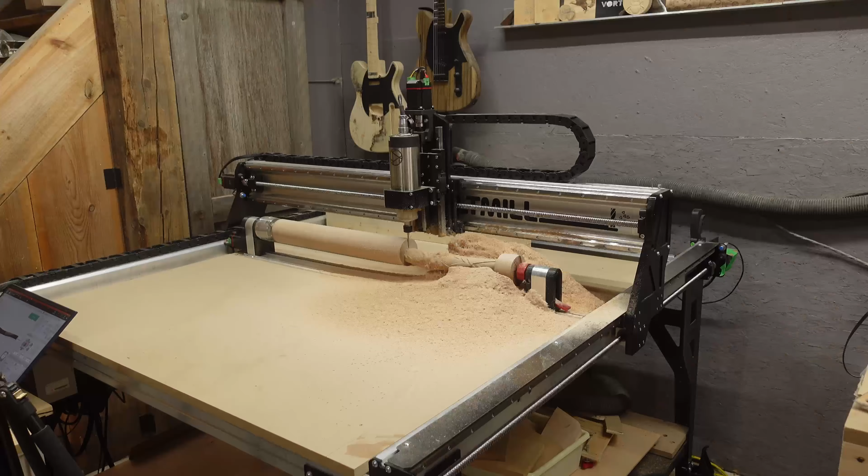I'm trying to keep my cool here, but I'm not gonna lie, it's pretty hard to contain my excitement. Why, you ask? The main reason for making this video is because we were invited by Vectric to present at their yearly user group meeting in Texas. We tossed around some ideas for topics, but ultimately, we decided on presenting a rotary project and showing how to use some really cool, lesser known techniques.

With the level and amount of information we are going to share at the UGM, we thought it would be a good idea for people to be able to watch a recap when they get home, just in case they missed any details, more than likely. And thus the 2-for-1 video was born. A super informative in-person presentation at the UGM and a tutorial video for those who want to learn about all these fun techniques. So what is the actual project going to be?

We are going to create an absolutely epic 60-inch long, 3-inch in diameter, 2-piece dragon-headed walking stick complete with scales. Woo! I can show you if you want. Look at this thing. It just keeps going. There you go. So we got the who, what, where, and why. Now let's talk about the how.

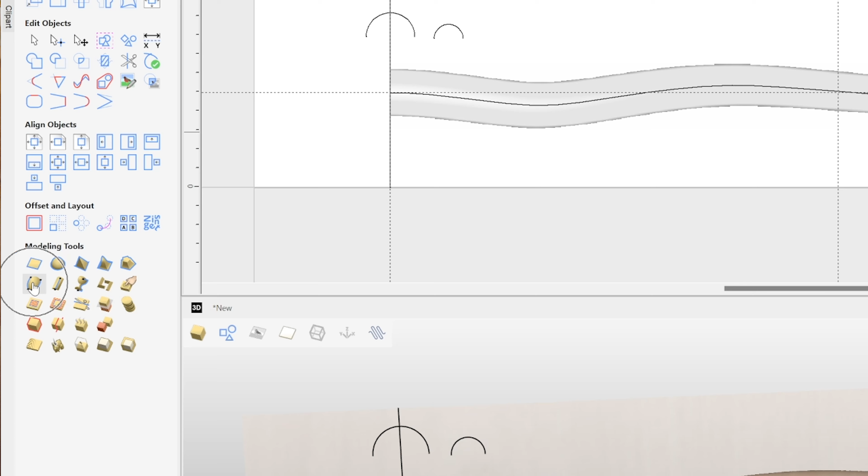We're going to create one component that's got some wiggle to it using the extrude and weave function. Then we're going to create another component that's got some wiggle to it using the 2-rail sweep function. Then we're going to tell the first wiggly component to follow the wiggle of the second component to morph it in kind of a helical modical thingy. That's right, I said modical. Everyone with me so far?

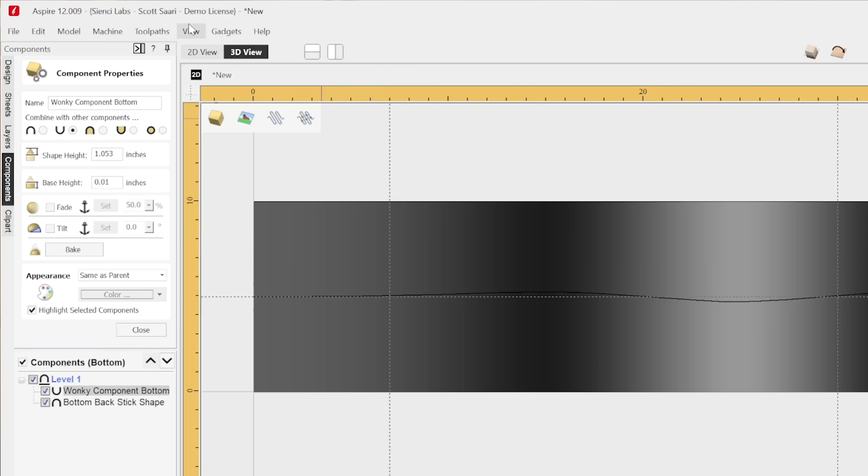It's okay if you're not with me. Believe me, I felt the same way while I was figuring this all out many times. And lastly, we're going to export that helical modical thingy to an STL, which will be used as the base for our full walking stick.

I do want to clarify that I purchased the dragon head model online that I'll be using for this project. I'd love to say that I modeled it, but ain't nobody got time for that.

The walking stick components need to be created in a double-sided document so we can create the top side and then mirror it to the bottom.

So the document setup is as follows. Double-sided, 60 inches long because that's how long I want the entire walking stick to be, even though I'm going to cut it in half to do the actual rotary. 10 inches tall. My rough stock diameter is 3 inches, so I'll make my material 1.5 on each side, so I'll get 3 inches total.

The rest of the file settings are your preference, so set them up to what you like to do and let's keep going. I've obviously worked through the kinks for my particular project, so you may have to do the same for yours if it's got any differences.

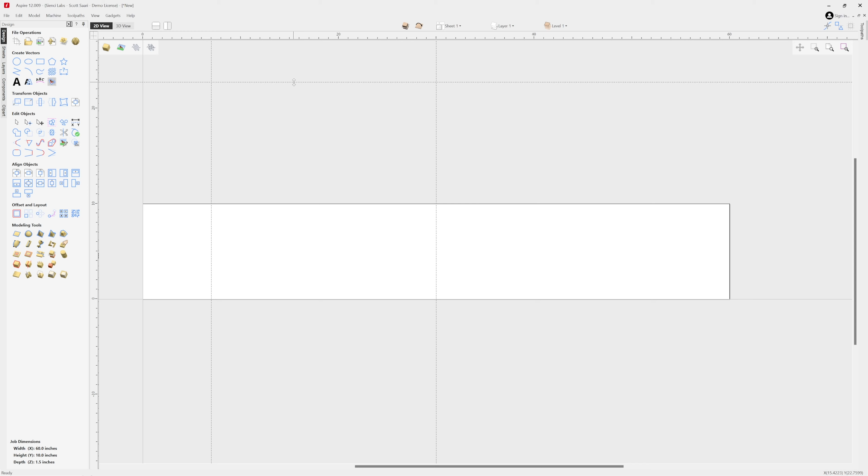I'm dropping some guides in as references. One guide at 7 inches for the approximate size of where the dragon head model will go once I add it. Another at 30 inches, which will be the midway point of the finished walking stick, and one at the middle of the document horizontally, so 5 inches in my case, which I'll explain why right now.

The first thing we'll need to do is to create a squiggly line. But before we draw the squiggle, we need to talk about undercuts.

For those who don't know, an undercut basically means an area with 3-axis rotary projects that the bit just can't get into because of the constraints of 3-axis carving. One of these undercut areas would be if you cut past the center axis of your project.

This factors in when we draw our squiggle and when we import the dragon head. You want to be aware of how far you push the squiggle so that it stays above the center axis, which is why I drew the initial guideline across the midline of the document.

If you don't fully understand, keep following along and I'll show you what this all means shortly. And even though you're armed with all of this info, there's still a chance that we create these components and still have to come back and tweak them. But at least you'll understand the how and the why.

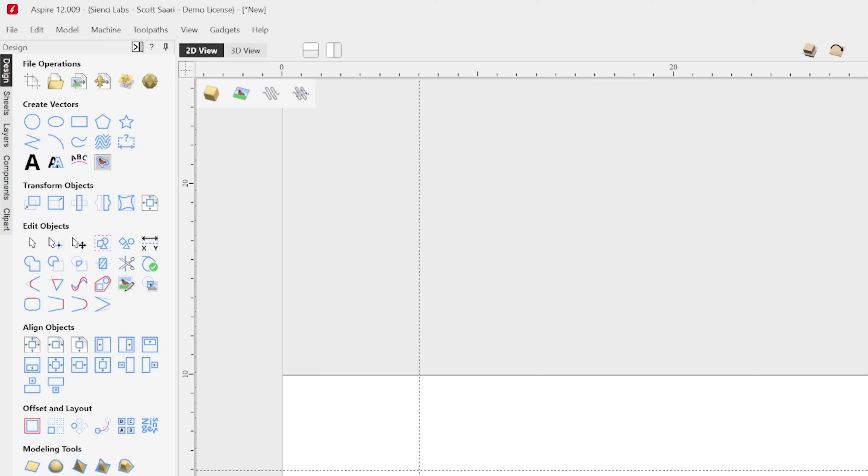We're going to use the draw line tool and create a wiggly line. Because I know I'm adding the dragon head to the top of the walking stick, I'm going to leave some space to incorporate that element later.

My experiment showed me that it was easier to make minor adjustments than major ones when we import the dragon head model later. Adjust the spacing and the beziers to your heart's content.

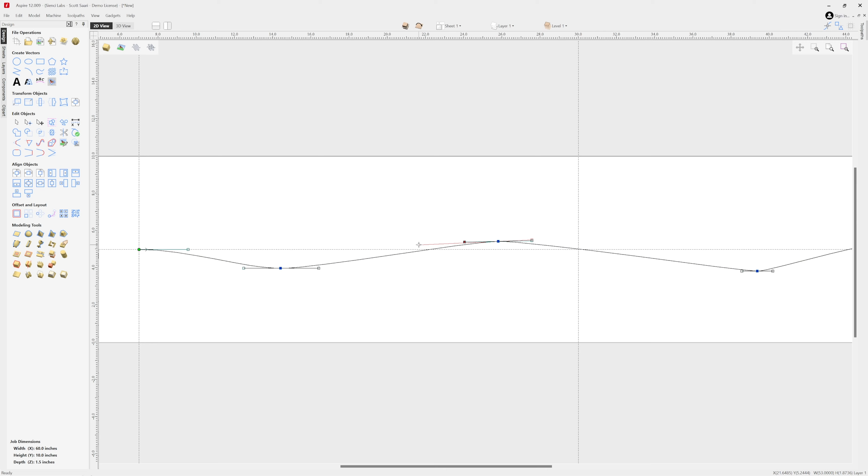Next, we're going to draw 2 circles, one for the top of the walking stick and one for the bottom. My material for the walking stick will start at 3 inches in diameter, so I'll make the top circle about 2.5 inches in diameter and the bottom one 1.5. These should give me a pretty good walking stick feel. I don't even know what that means.

These circles are a big factor in whether or not an undercut will occur. The diameter of the circles will dictate whether or not the model drops below that center axis, so that's something to factor in when you're creating these setup lines. The circle creation locations don't matter, so create or move them wherever you'd like to.

Enter into edit node mode, and when you see the little squiggle, type D to delete the spans. Now we'll create the first component using the extrude and weave function.

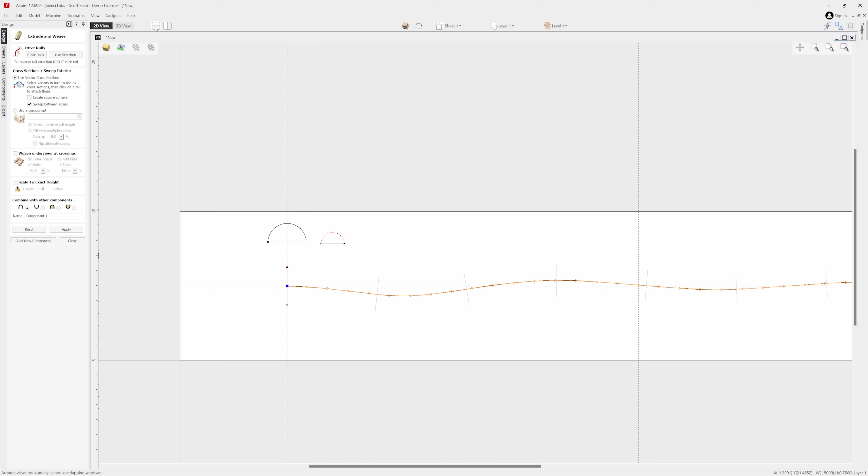We're going to tell Aspire to extrude the half circles along the wiggly line and blend them together along the way. We're basically creating like a tunnel shape. I like having my windows in split view for this so I can see what's going on. Grab your wiggly line and click Use Selection. That's my center line rail. The arrows show the direction it's being created in, so if you want them reversed, right-click and reverse rail.

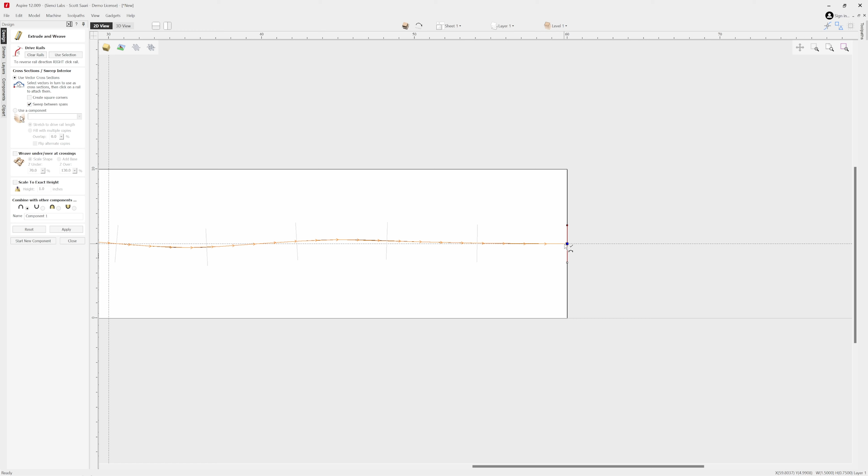Then grab your larger circle. You'll see a little check mark pop up when it's in a spot where you can attach it to the line. I'll select the top of the walking stick with this one, and then do the same for the smaller circle at the bottom. You'll see corresponding color nodes for where each cross-section's start location is.

I'll leave both square corners and sweep spans off. Neither of these will factor into the shape we're creating this time around. Sweep between spans can help control the shape outcome when using different shaped cross-sections, as long as I have the same number of nodes, so have some fun with that when you experiment. I'm not weaving anything this time, so that's off. Scale to height is off because the circles we created are dictating the height.

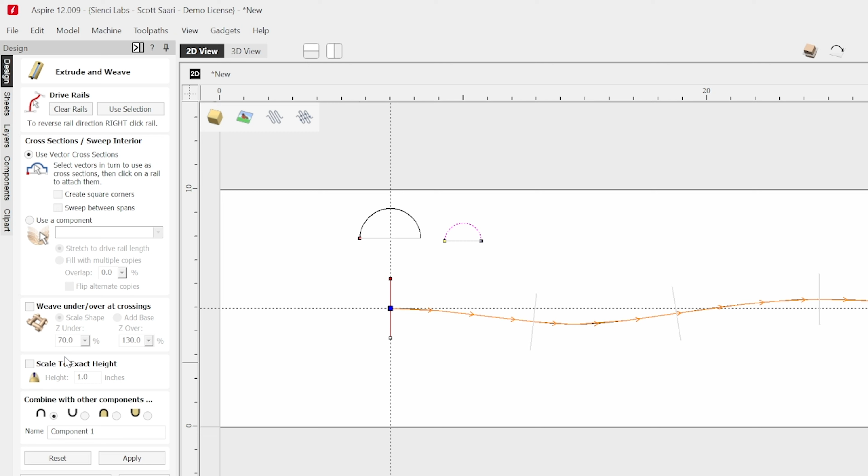I'll name the component top front stick shape. Click apply, and ba-bam, you've got yourself half of a walking stick. This is the first chance you'll have to see if there are any undercuts going on, so let's have a look. You can see no part of the newly created component goes past that center axis, so I think we're good to continue. If you did see a part that looked a little sus, just delete the component, tweak the lines, and recreate until you've got it nailed down.

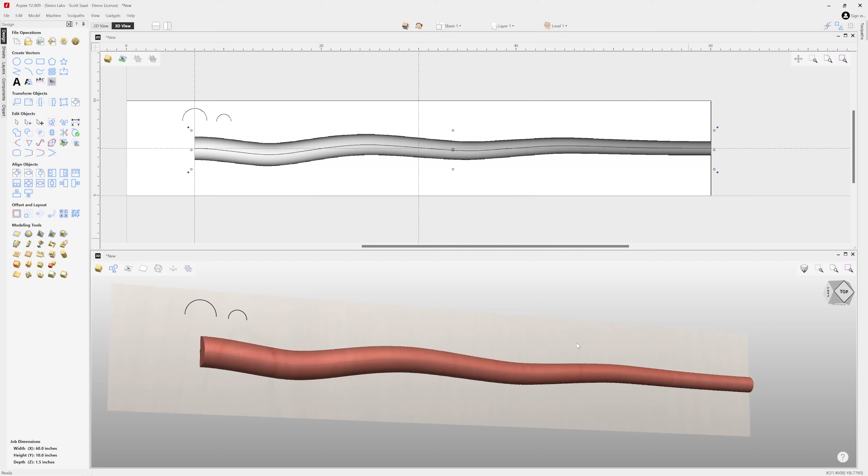The 3D view is currently only showing what's on the top side. If we toggle both sides on, nothing will happen because there's nothing on the bottom side yet. Let's put something back there. Right-click on the top side stick shape component and select Copy to Other Side. You'll see now the top side component mirrored on the bottom, and it's starting to look like a wonky walking stick.

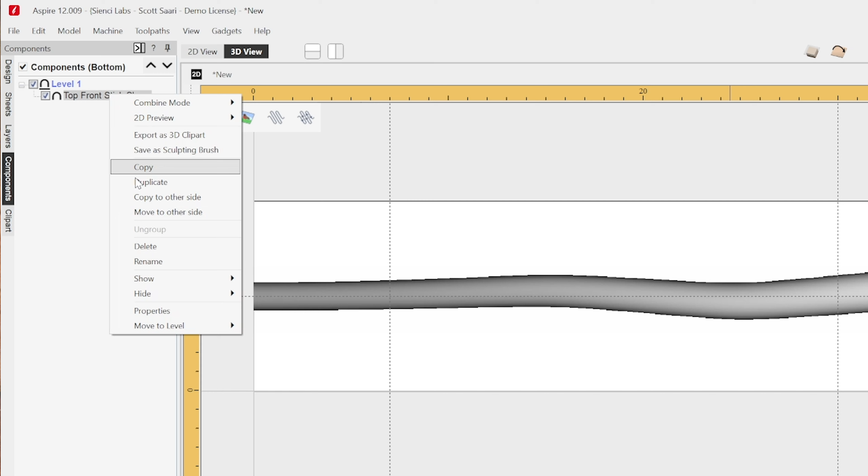I will rename the mirrored component to Bottom Back. My issue now is that there's only wonk in one axis. I really want it to be wonky in 2 axes. We still haven't determined what the right pronunciation is. There's just not enough wiggle all around for me.

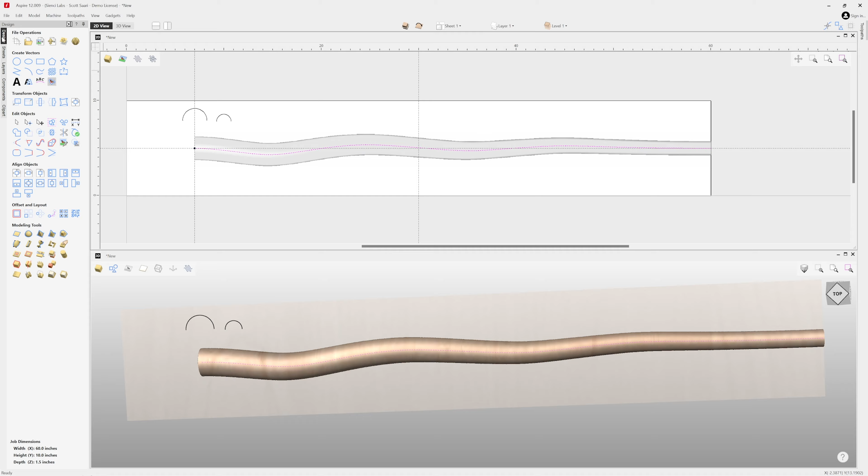So let's create the second wiggle component that will add some wiggle to the first one. In my 2D view, I'm going to use the same wiggly line we used already. I'll create one vertical line on the left, then Ctrl-Shift-H to create a copy horizontally on the opposite side of the document. Ctrl-Shift-V will create a copy on the opposite side vertically.

Select 2 rail sweep. Select the 2 straight lines and use selection. These will be the drive rails this time. You can single select these to change the order, but that doesn't matter for what we're doing here. Select the cross section, the wiggly line we already created. Same as the first extrude we did, I'll leave all the options off.

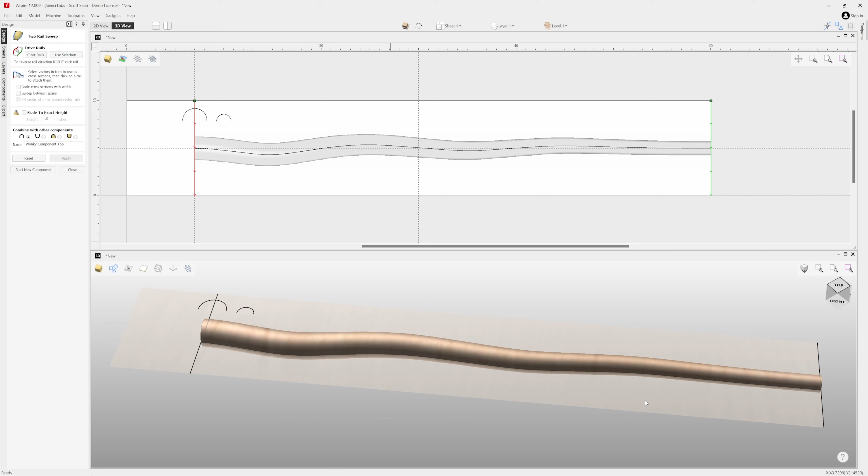I'll bring my split view back up so you can see the magic happen. I'll rename this component to Wonky Component Top. As soon as I click apply, you'll see it create a second component that will automatically force the first component to bend to it. Ta-da! Super cool! Here's the newly created wonky component.

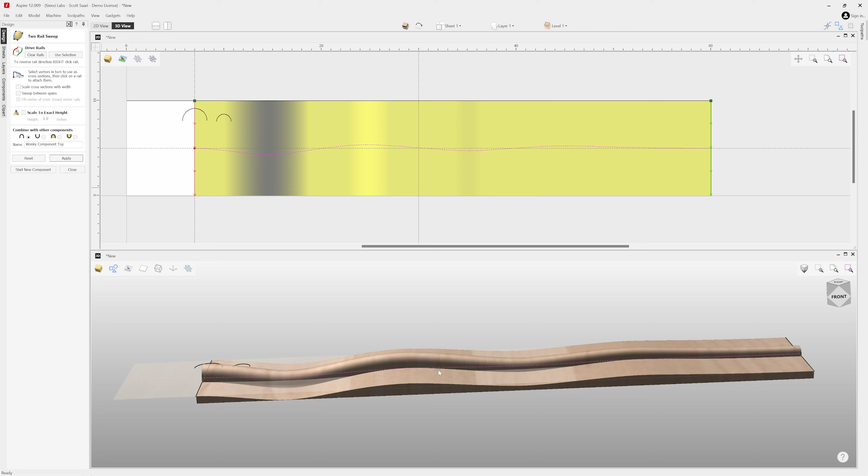Here's my original walking stick-ish component. But clearly this doesn't look like a walking stick. It's actually really simple to finish this whole thing off. Select the wonky top component, right-click, copy to other side. I will rename to attempt to keep myself organized.

You can see in the bottom view I have a mirror of what's going on the top. The issue is, when I toggle on show both sides, you end up with this weird looking hourglass sort of something or other, but not a helical walking stick that I'm after.

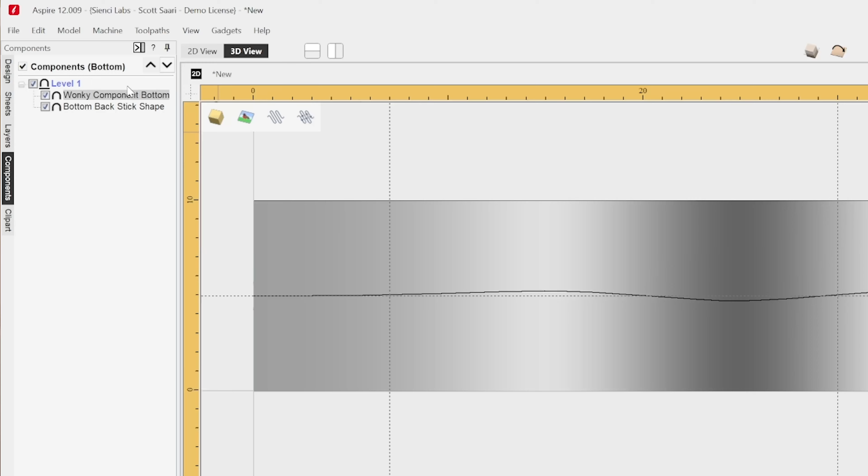It's all good. Right click on your bottom side wonky component, change the combine mode to subtract, and enjoy the magic. So instead of using an additive combine mode, the wonky component is now subtracting to create the shape we want.

Boom! One walking stick looking very walking stickly. We've got wiggle in both top and front axes, which is exactly what I was after. With the exception of these flappy looking wingy thingies. That's just leftover bits from the wonky components we were using.

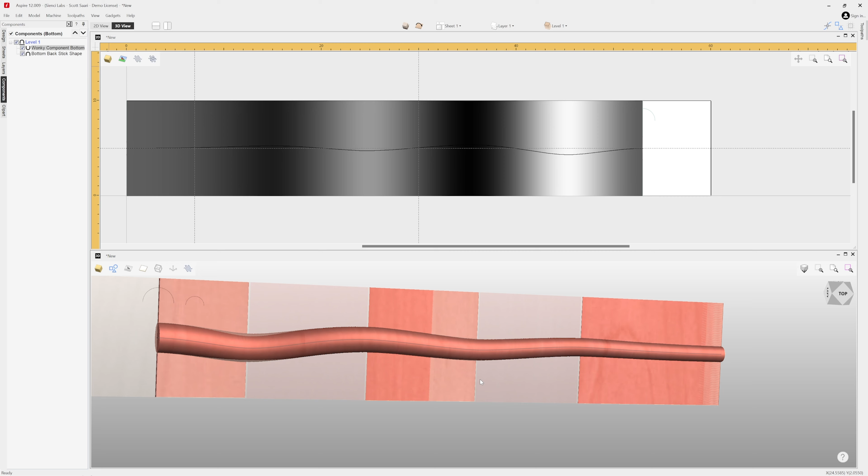The problem is, if you export this shape as an STL right now, those flaps will export as well, and that's not gonna work. Simple solution: again, we'll adjust the base height on the bottom wonky component. If we bump the base height to 0.01, it will basically erase the leftover flappy bits, and we're left with this beautiful helical 60-inch walking stick.

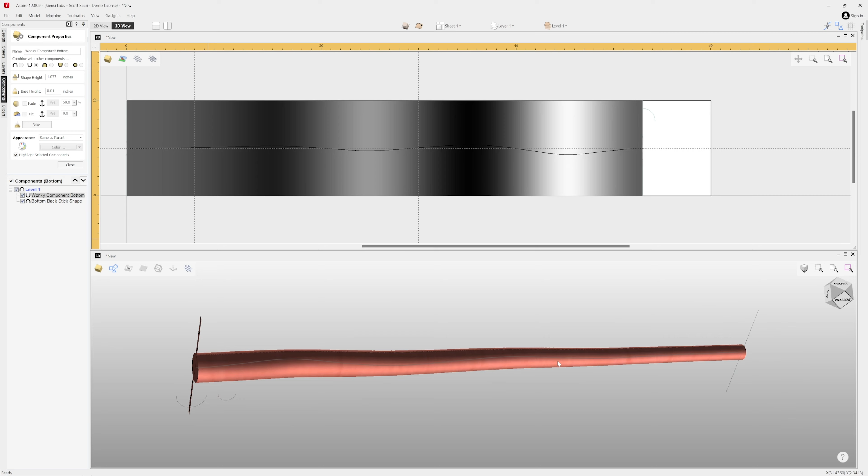And the best part of this? Now you know how to create some pretty uniquely shaped models directly in Aspire using different methods. You don't need a third-party software like Fusion, Onshape, or Rhino.

The last step is to export this model as an STL. Easy peasy, go to the modeling menu, export as STL. I turned my tolerance to 0.002 so the model was extra smooth.

These first 3 options will not export what we're looking for. It'll do some weird stuff. So select the last option, hit triangulate, and save triangulation.

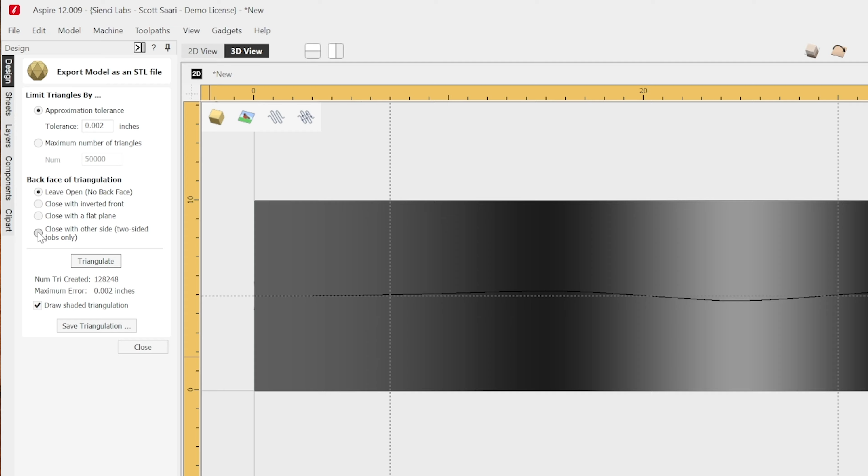Okay, so that was a lot of information. I hear you. If you need a break, you probably need a break. I don't blame you. Hit pause, grab a coffee, go for a walk, take a breath, refresh.

Now that we've got the base stick exported, let's create the actual walking stick itself. Create a new rotary file that's 30 inches long, not 34 like the actual material is. There is a reason for this.

One, 3D models will automatically get cropped to the job size, so it doesn't really matter if they're too long. Two, it's going to make it easier to set up the job so the two halves will join up properly when the time comes. I'm going to make the job dimensions longer, but not until after we've done the modeling work. Trust me, it'll all make sense soon, I promise.

3-inch diameter. The rest are the usual rotary settings, so make sure that they're clicked properly and we'll keep rolling. Now we're going to import the dragon head model.

I want to leave the weakest part of the carve to the last if I can. If you carve the weak part first, clearly you risk the entire project not surviving because of the forces on the weak part during the rest of the carve. Whereas, if you leave the weakest part until close to or the end, your chances of success go up.

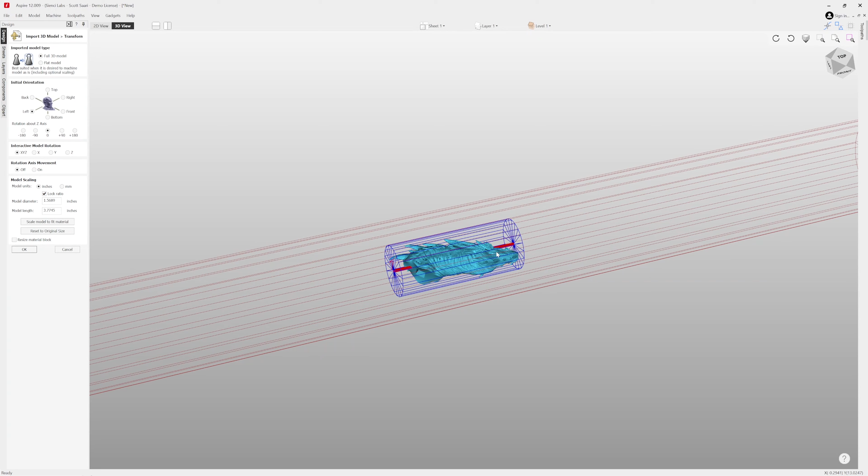The dragon head here is a great example. Where the snout meets the tab that we'll add later, it's the weak point of the carve. I'll be using climb carving to minimize vibration, so I'll have to change the orientation of the dragon snout to the left to leave it to the end of the carve.

I'm going to talk more specifically about the cutting direction a little later when I get to the toolpath portion of the project. Now that you know that, let's run through some settings.

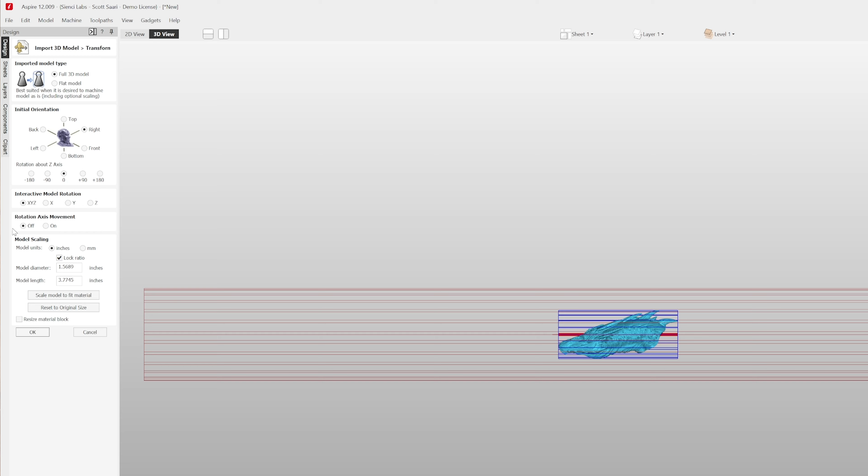Initial orientation, right, so he's facing left. Interactive model rotation on X until it's more or less vertical and centered, because right now it's kind of weird looking. Scale, I made this 2.9 so it fits just inside my 3-inch stock, which I'm gonna have to redo in a second.

And then rotate on Y so the red center axis is hidden inside the model. Then I rescaled to 2.9 again and hit OK.

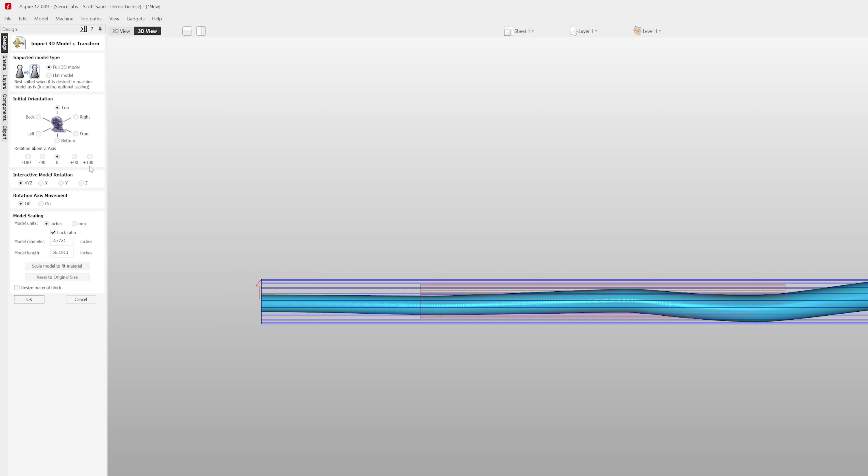Now I'll import the walking stick itself. I rotated the model 180 degrees so the larger diameter side was on the left to match up to the dragon head. I also scaled my walking stick non-uniformly.

I made it 2.5 inches in diameter, and I'm going to make the length 56 just to make the math easier. Write down your import scale dimensions, you might need them later.

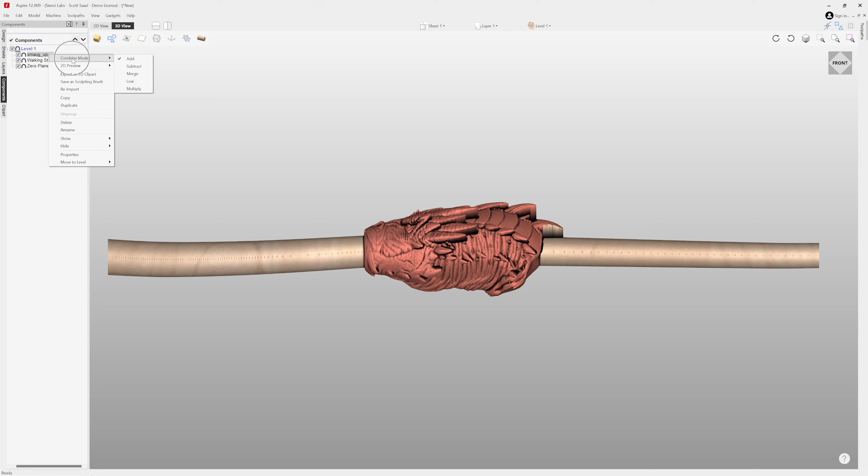Another thing to remember is that by changing the order of the components in the component stack, you can achieve different results. So give it a try if you're feeling frisky.

I'll move the dragon head over to 0 on X so that it's at the very top of my walking stick. Using the transform tool, I'll get the walking stick and I'm going to change the pivot to bottom left and move the walking stick over to 4.75 inches.

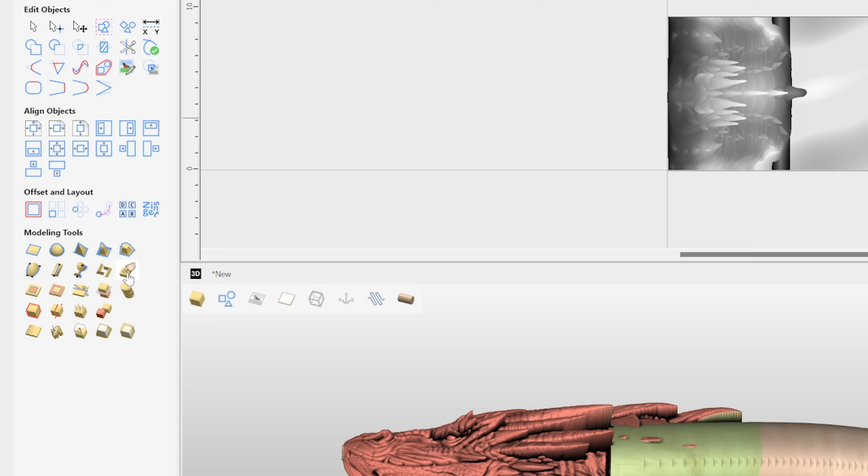You can see pretty plainly the dragon head and the walking stick don't blend together seamlessly. I could try and scale both up or down to get them closer, but the reality is it just needs a little more finessing. This is again where the higher end modeling tools within Aspire come in super handy. I'm going to use the Sculpt Visible Model tool to blend the two models together a little more seamlessly.

I use the remove option to obviously remove some of the dragon neck that was a little unsightly. I selected the walking stick portion and used deposit to build up some of the low areas. And finally, I used the smooth option to go in and create a fairly smooth transition between the two components.

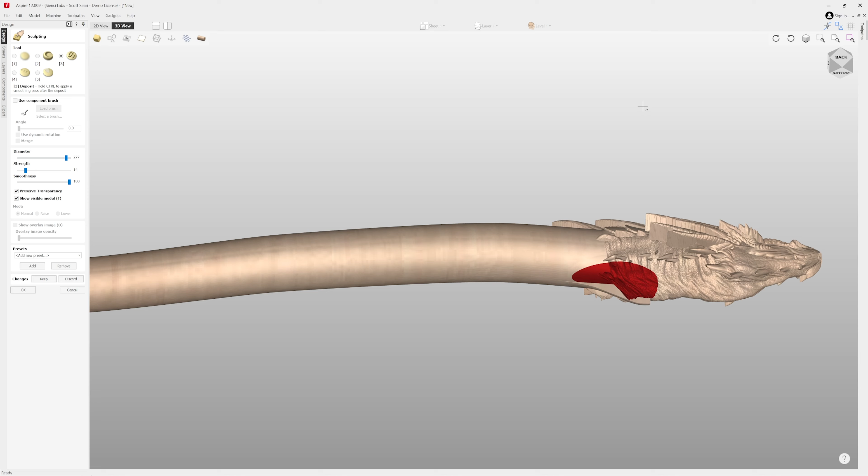You can paint in wrapped or unwrapped modes by clicking on this little cylinder icon right here. Painting in wrapped mode is super handy because you can see exactly how the changes interact, but can take a little practice to master because it paints as though it's still unwrapped. So now you just sculpt the models until the transition between them looks a little bit better. And depending on how picky you're going to be and who you are, this could take a little while to really get it dialed in.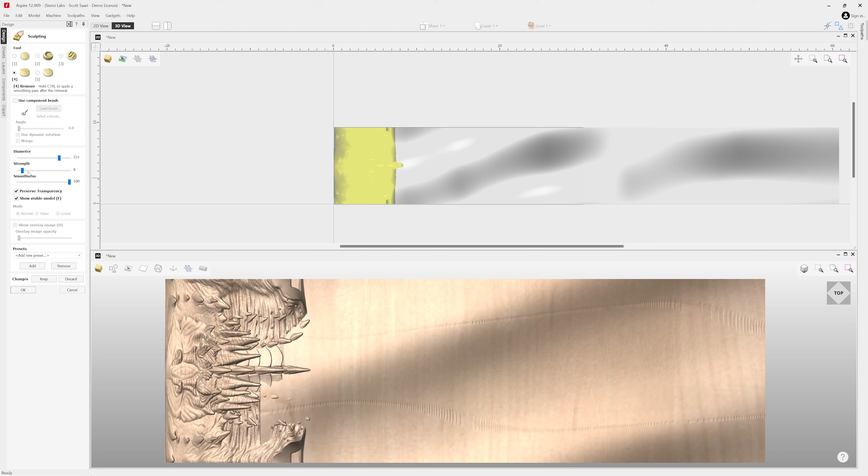Don't forget to change around the size settings for the brushes too. You've got some amazing controls available, so try them all out and see how they work. You can always undo or remove by painting areas if you don't like what result you're getting. A huge note here. Once you've applied sculpting changes to a model, you've basically baked the changes into the model. It will crop it to the job size and you will lose the ability to re-import it.

It just so happens the fine folks hosting this user group meeting have something in common. No, they don't have scales. Not that I know of.

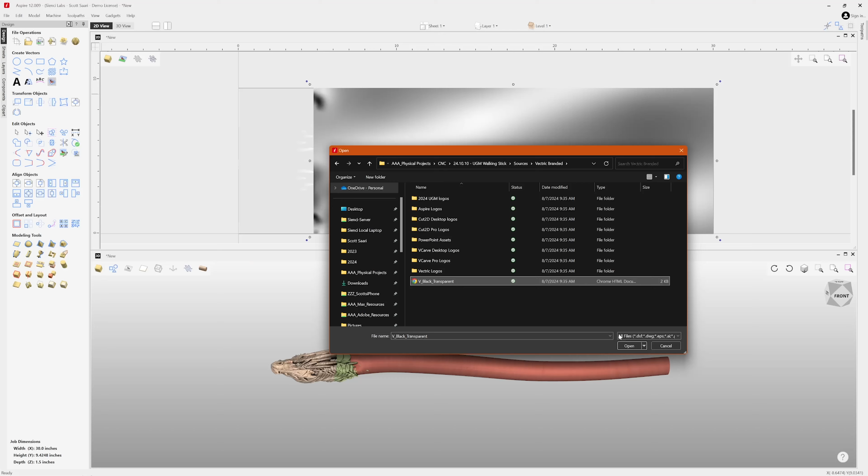Come on, people! I mean, their logo is a roundish V shape. So we're going to use the Vectric V to make the scales for our dragon walking stick. I've got the Vectric V in vector format here, so I'm going to import it. I experimented with a few options to get the pattern to look its best. You can create a pattern with vectors and use a pocket toolpath. You can create a pattern with vectors and create components, or you can create a textured area component.

I found that no matter which method I chose, the pattern would get a little squashed and stretched when it was applied. This is unfortunately because the surface of the model isn't flat, and therefore the scales kind of stretch and squash with the shape of the model. I'm going to show Becky how I do this in another software so there's no distortion, and if Vectric thinks it's important enough, maybe they'll spend some time tweaking their settings. Ultimately, I found creating the pattern with a group of vectors turned into a flat component netted the best results.

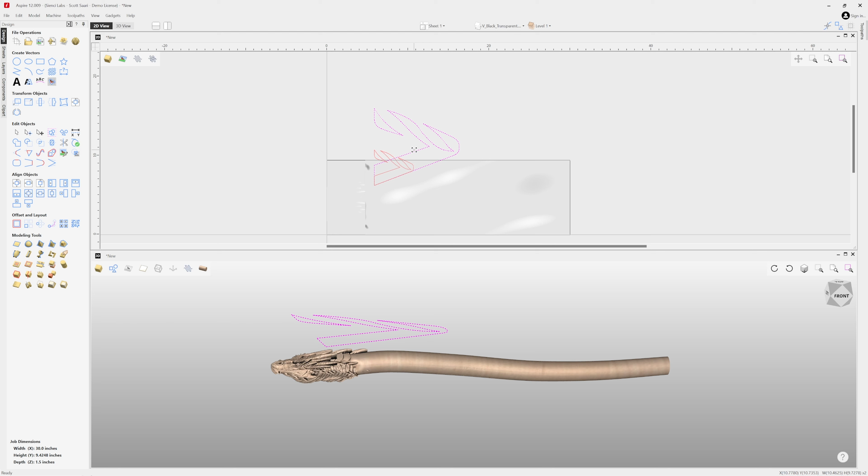So grab your vector. The size doesn't really matter right now, you can always scale it down later. Use the Array Copy tool, and here's what settings worked for my project. The rows and columns are going to equal as many as you need to cover your model size. You'll probably need to experiment with these numbers. Offset selected equals the same dimensions as your X and Y object size. Symmetry I had as L shapes.

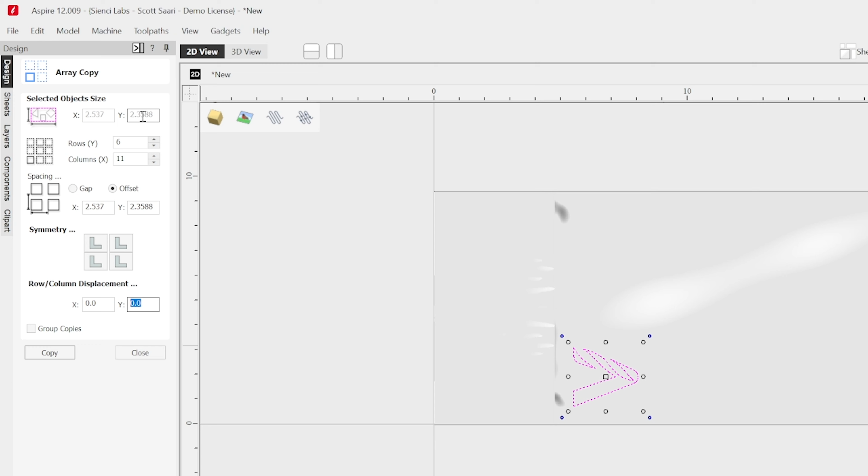The row and column displacement equaled half of your X or Y object size, depending on which orientation you want the pattern to be repeated. In my case, I'll enter in half of my Y value under my Y displacement, hit copy, and voila! The Vectric V scale pattern is born. It's so majestic. I purposely made the array larger than I needed to for the top, but that's only because I know from experimentation that I'll need more on the bottom side when the time comes.

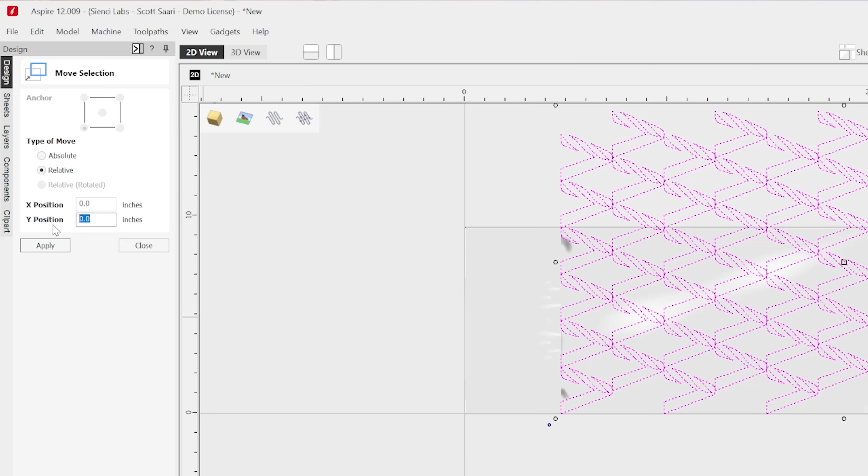I also made sure I offset the scales pattern so that it lines up with the two halves where they wrap around, so the V's aren't cut off and doing something weird. With all the pattern vectors selected, choose Create a Flat Shape Component. Rename, then change your base height to whatever you'd like. If you want to check on the fade or tilt, if you'd like them, go for it.

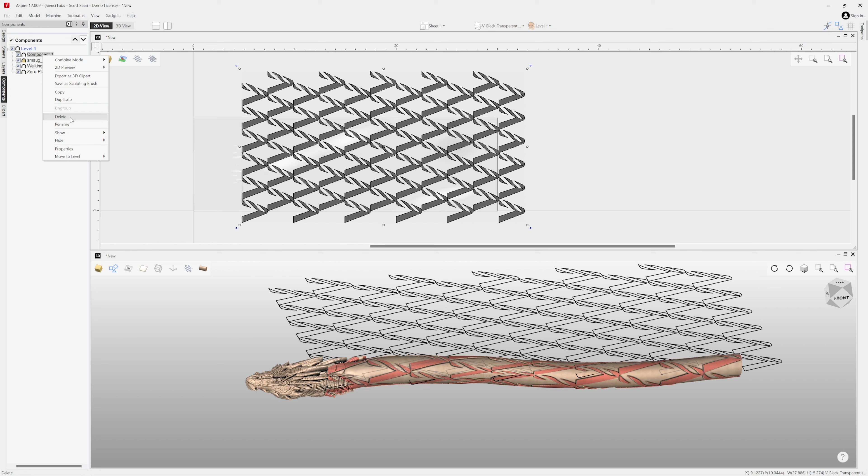I'm not going to. Hit Create. Now you've got a scales pattern component that will follow the shape of your walking stick. You can still move this component around as well if you'd like to. I'm going to move the scales down in the component stack so they're underneath the dragon head, and ta-da! This looks so much better than when I started.

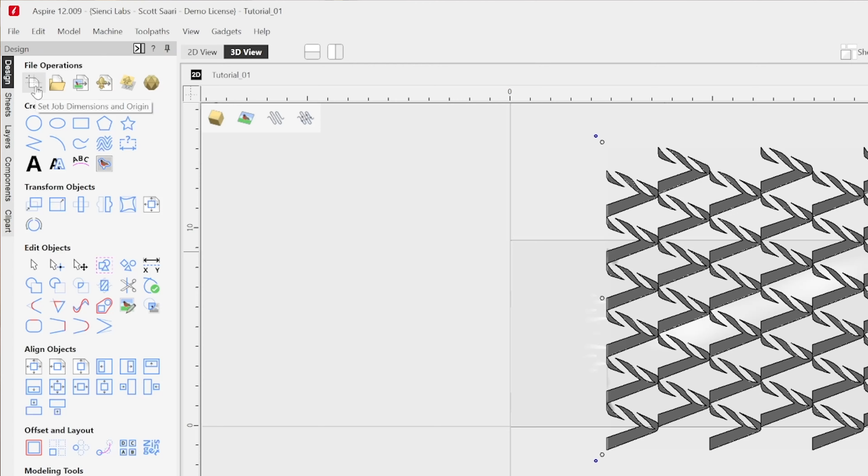We need to add some tabs to hold everything in place. But first, I'll need to make the file size larger like I talked about way back in the beginning. I'm going to make it 34 inches just like my material and leave everything else as is. The great part of creating this way is that the 3D model got automatically cropped to the correct size, so that's already done. I know by adding 4 inches to the length that I have 2 inches on both ends, so I'll select everything and move it over by 2 inches.

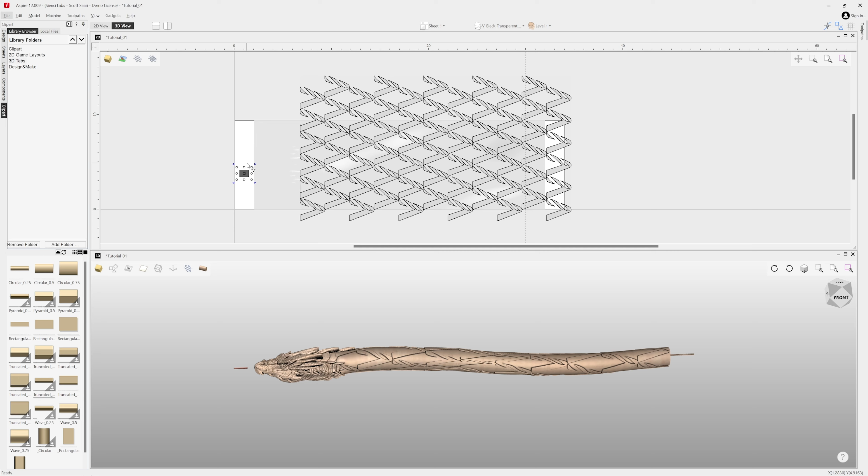Grab a 3D tab from the clip art menu, scale it up to fill the blank space, but leave a blank space right at the snout there. You'll see why in a second. Holding Alt allows you to free transform the tabs. I'll rename and change the base height to 1.5 so it's the same-ish diameter as my material. Just be careful not to make them too big, otherwise you'll get a warning when you go to do your toolpaths.

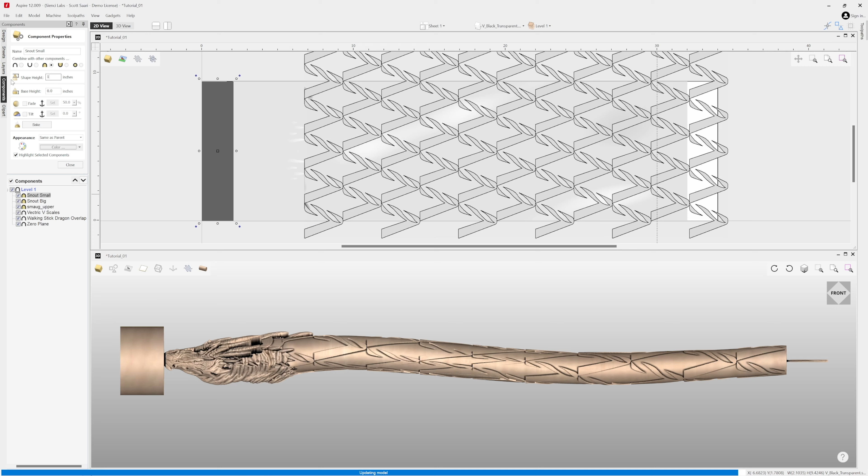Now I'll copy, rename, and make another tab just a little bit smaller, a little sturdier, close to the size of the dragon snout. It should make cutting the tabs free a little bit easier. Select both tabs, Ctrl-Shift-H to make a horizontal copy. I'll adjust their placement to contact the model, and the top of the walking stick is basically ready to go.

Now that we've got the top half of the stick figured out, let's get the bottom done. The whole model's overlapping thing makes this a little tricky, but I think I figured out a pretty simple way to show you. Create a new sheet, rename, and activate it. If you didn't use any sculpting tools on the top half of the walking stick, then you can just copy that component to the new sheet and ignore this next part. If you did do any sculpting for the model on the top half, you'll have to re-import your walking stick model. See why I said to write down your settings?

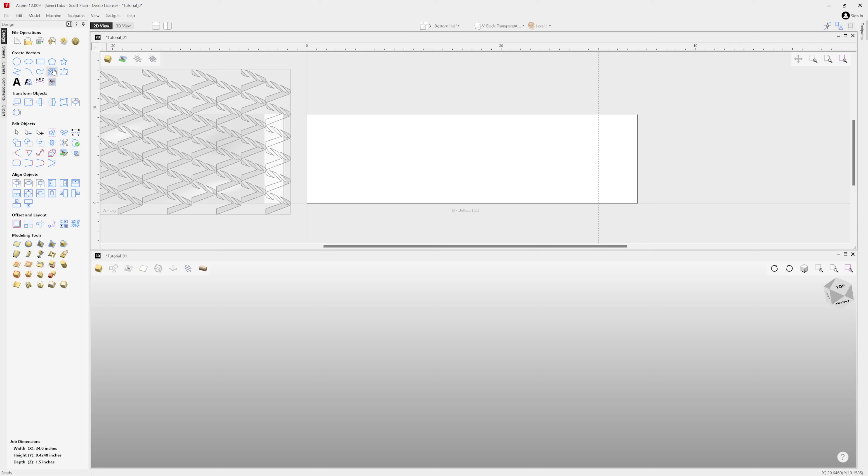Import the walking stick on the new sheet. Change the settings to match what you did the first time you imported it. If you don't remember, I rotated mine 180, I unlocked the ratio, and I made it 2.5 inches in diameter and 56 inches long. Just like pretty much everything, there are other ways to figure out the leftovers, but this is the way that I used.

Each section of the walking stick is going to be 30 inches long. If we take 30 inches and subtract how far we moved the walking stick over by for the top half, 4.75 inches, that equals 25.25 inches. That's how much of the original 56-inch walking stick we actually used, which means 56 inches for the original walking stick minus 25.25, the amount that we used for the top half, equals 30.75 inches. So that's how much of the newly imported walking stick we need to keep.

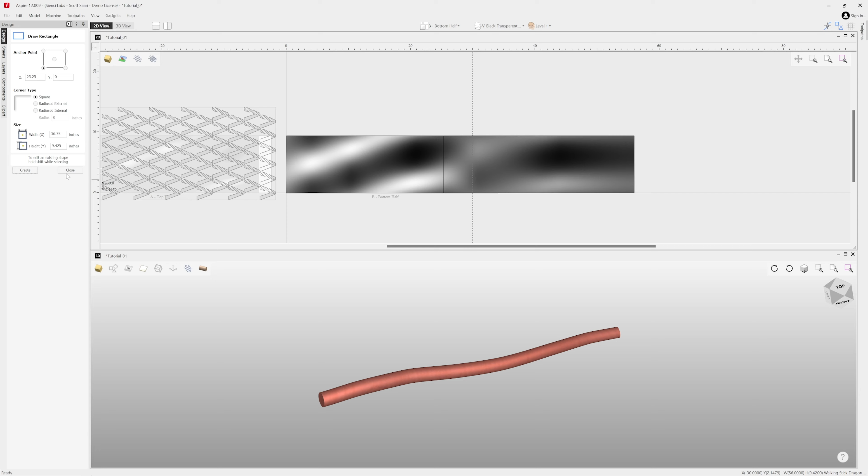Select the 3D model, go to Transform, change the position to bottom left, and move it over to 0. Then we can create a rectangle that's the size of the portion of the walking stick that we need, so 30.75 inches. We're going to place it at 25.25 inches to help us move the model into place. Now we have the portion of the walking stick we need to carve right where it needs to be sliced to line up to the top portion of the walking stick. When I did my first test, it wasn't this meticulous, and let's just say it didn't turn out. That's why I did this.

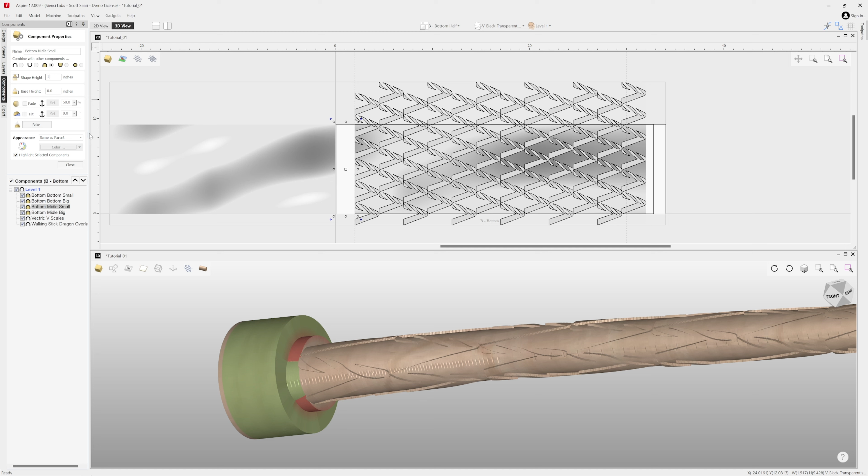Now I'll copy the rest of the components and tabs that we can recycle to the new sheet. Unfortunately, I did redo the array on the V's so they filled the bottom length. I thought I had it right when I did the top, but clearly I didn't. I'll also adjust the tabs as needed so that they are contacting the model and the correct diameter. To hopefully make life easier, I'm adding some registration marks to the end of each of the walking sticks where they're going to connect together.

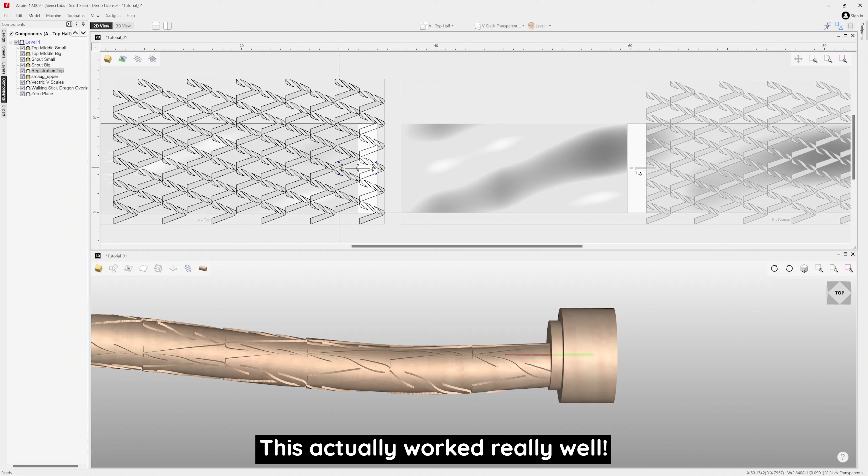I'll create a really tiny rectangle that I'll turn into a flat component, just like we did with the Vectric V's, that I'll center on the middle end of the bottom. I'm going to copy that component to the other sheet and slide it down to the middle where they're going to connect, and fingers crossed that we end up with a little mark showing us where the two halves should line up when we twist it together.

And last but certainly not least, we gotta make some toolpaths. It's going to be the same process for the top and the bottom, so I'm only gonna do it once. I've done quite a few rotary experiments and have yet to see a 3D finished toolpath carve faster than the spiral layout version. And because they're very simple to set up, that's what I'm gonna roll with. Go up to Gadgets, then Wrapping, and Spiral Layout. We only need to touch 3 settings to make this work.

Strands, 1. Done. 0.00625 for spacing between strands. This is basically the same as setting your step over within your bit settings. The formula for it reads like this: 0.0625 inch tapered ball nose multiplied by a 10% step over equals 0.00625 spacing between strands.

And lastly, the twist direction is something I reached out to Vectric about. Your toolpath direction and the rotation of the stock dictate climb or conventional cutting. That basically means the bit is pushing the material away as it's cutting, or it's pulling it in. There are times and places for both, but for this project, because of the length of the material, without any support in the middle, I wanted the bit to pull the wood towards it, climb cutting, to minimize vibrations and reduce the chance for breaking.

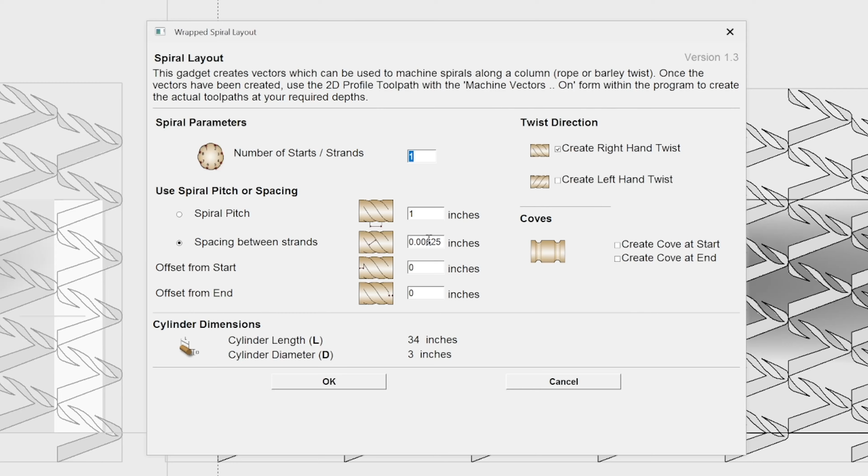In order to achieve this, I'll be cutting right to left. Right to left? Whatever right to left is to you guys, right to left. So I'll use right hand twist. It'll take a minute to calculate. You can see when it's done that it's created a vector that will be the continuous toolpath. There is one tweak we need to make to this vector though to make it cut absolutely efficiently.

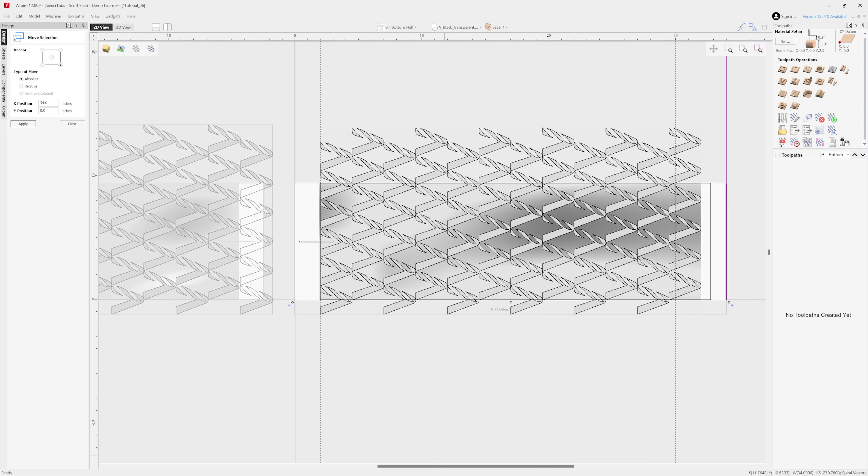Select the vector, use the transform function, set the pivot to bottom right, and change the Y value to 0. You'll see the vector move to the right side of your model. This doesn't change anything about it other than removing basically a whole bunch of unnecessary air carving, we'll call it. Now we can add a profile toolpath to the vector. Cut depth of 0 as it told us to do in the spiral layout instructions.

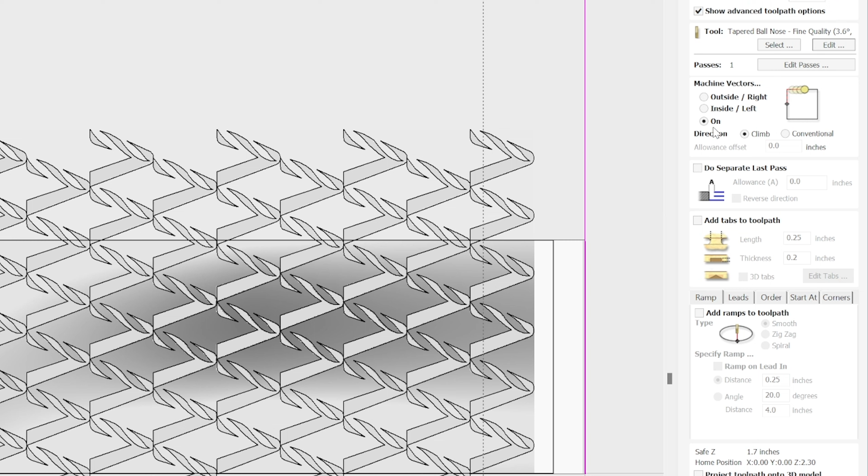Select your bit. I'm using a 16th inch tapered ball nose to get lots of detail. I wanted to see how fast I could get this thing to run, so I'm going big. Speed 600 inches per minute, plunge 300 inches per minute. Make sure the machine vector is set to on, add ramps if you choose to.

And here's a whole nother chapter to this cutting direction thing. Todd and Edward pointed out that you can also mess with the Start At tab where you can select where to start the toolpath from. This is another control you can use to change the cutting direction depending on what you have selected. I'll be straight with you guys, I didn't have time to do actual cut experiments with all the different options and settings that were here. What I found worked for me was leaving it at move to start points.

Again, I didn't have time to save each option, to carve them out, to see how they actually worked and which direction they went. So if you're experimenting and you find a method that works really well, please make sure you share that on the socials.

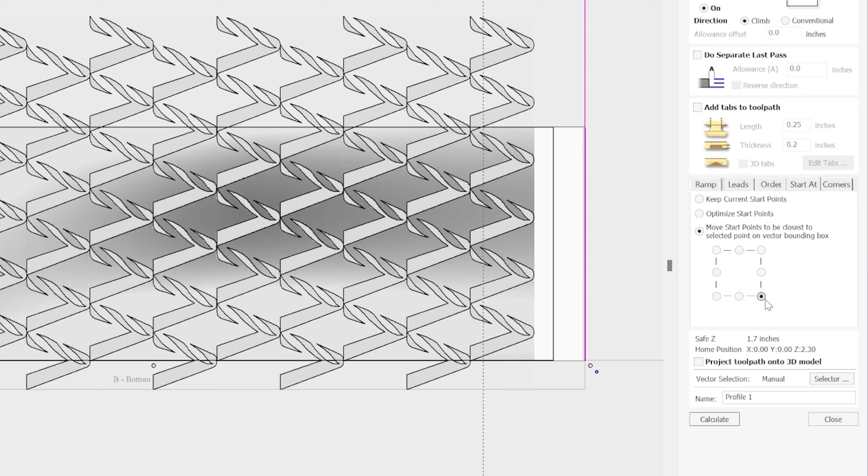Super important to make sure that you have project toolpath onto 3D model, otherwise that spiral won't wrap around your walking stick and you'll get nothing. Rename, calculate, which might take a minute or two. Save your toolpaths, load them in gSender, and let's finally get this walking stick running.

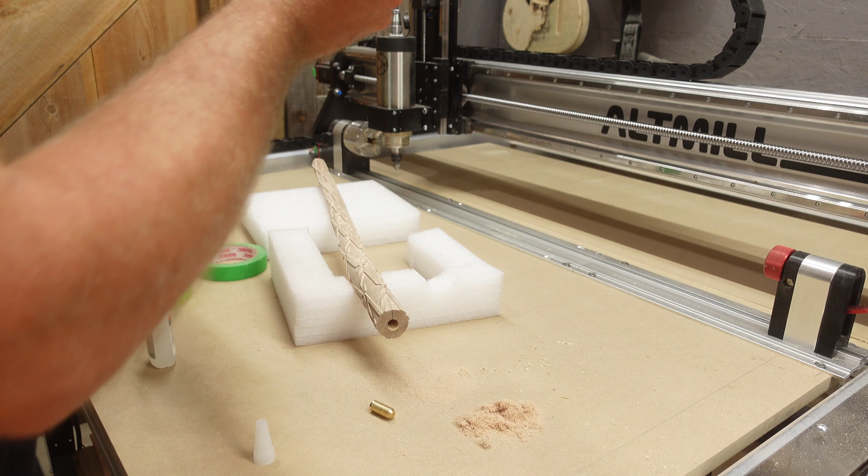Some thick super glue should hold these rock solid, I hope. I will suggest gluing one end of the connector in first and letting it dry. Then thread the second half of the connector onto the first, add glue to the hole without the connector, and slide the connector into the hole. Push the two halves together until they are flush in the middle and meet. Then twist the wet glue side until the registration marks line up.

I will be the first to say I'm not thrilled that this was my method for drilling these out. I take pride in my ability to figure out how weird things work and to make them work. But this fiasco did help remind me about a few important things. One, it reminded me to stay humble, which I already kind of think I am, but this just reminded me yet again, there is always something new to learn out there. Two, it reminded me to be honest about my struggles and to show them to everyone watching. I know someone out there watching has a way to do this and we can learn from them, which opens the door for people meeting new people, which is where all kinds of amazing collaborations and relationships can start from. I think that's a pretty amazing byproduct of one person being honest about not knowing how to do something. And three, sometimes tried and true is tried and true for a reason, but good for me for trying.

So what do you think? Pretty epic, eh? I think so. It's still fun for me when I do a project and I struggle and I'm surprised by how nice it turned out.

I don't know. Do you think I should go 2 videos in a row and see if I can get Sir Ian McKellen to give us a shout out?

I have not passed through fire and death to bandy crooked words with a witless worm.